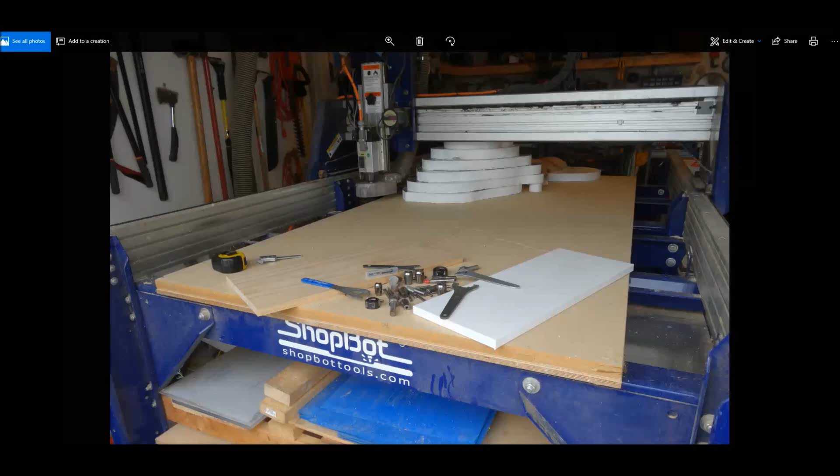Here, as you can see, I've got a pile of bits and a couple boards, and what we're going to look at today is building ourselves a custom bit holder.

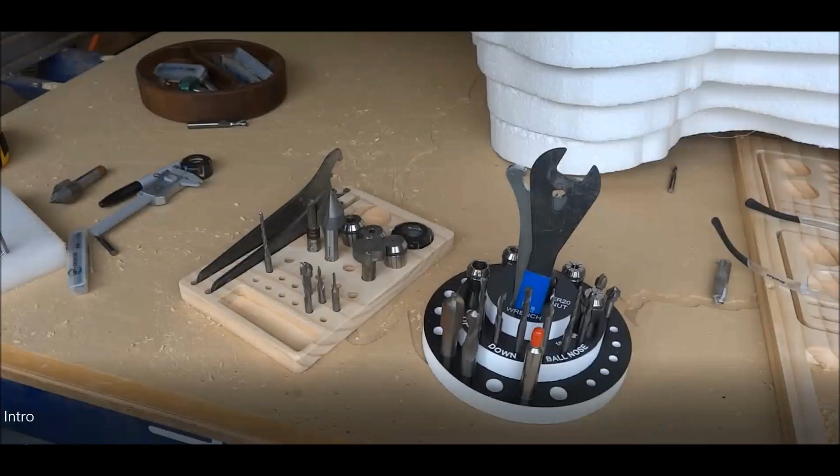So with that being said, let's look at the two different ones we're going to get into in this training. We'll start out with a simple one, just a rectangular block of wood with different holes in it for different diameter bits.

We're going to look at tolerances that you can add so you're not grabbing a really sharp bit with your soft fingers trying to pull that thing out of there.

Then we'll get a little more fancy into the circular version, where we actually get into labeling it and making different tiers for different bits. So these are the two different bit holders we'll go through in today's training.

All right, let's get this started by looking at a hot mess that I have laying here—bits laying around, collets, collet nuts.

First thing let's do—we've got two different ShopBots we're setting this up for. A full-size PRS with a 2-horse spindle, which uses a larger collet than the little desktop with a 1-horse spindle. So you get two different size collets.

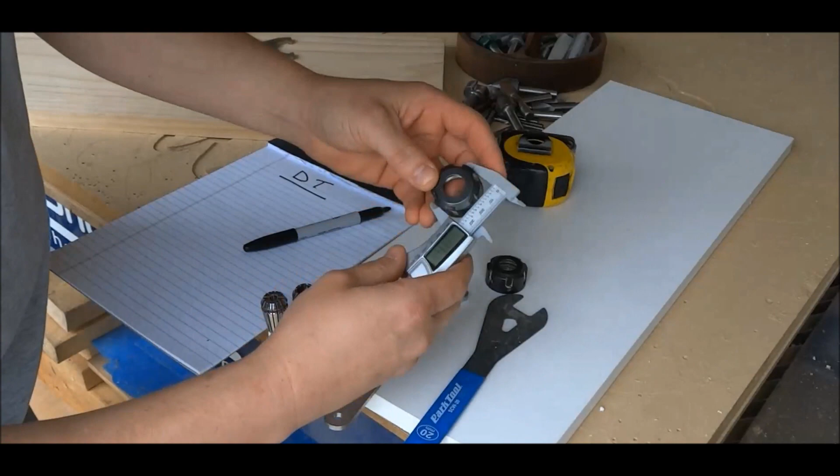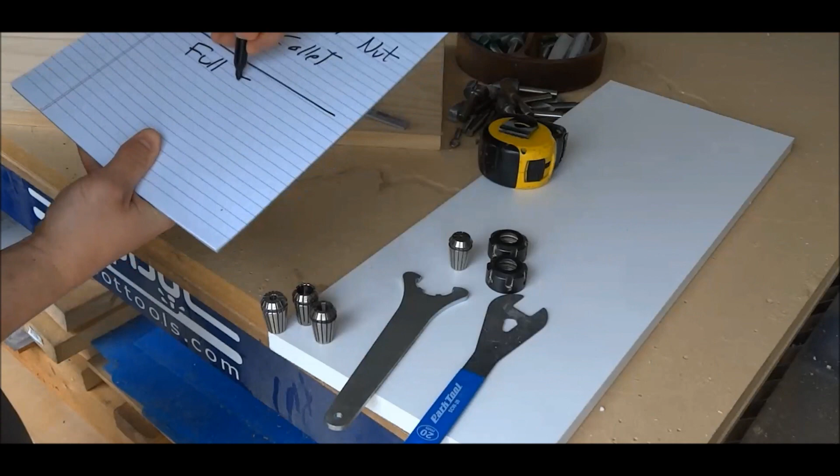I'm measuring the collet nuts, I'm measuring the collets, and I'm even going to get into measuring bit diameter for the shanks and also the wrenches.

Because what we want to do is know the exact size measurements, and then add in a tolerance. So when we're pulling pieces in and out of our new tool holder, we're not forcing them—we want them to sit in there freely. So measuring the board, measuring the tools, measuring whatever it is you're going to build into your tool holder.

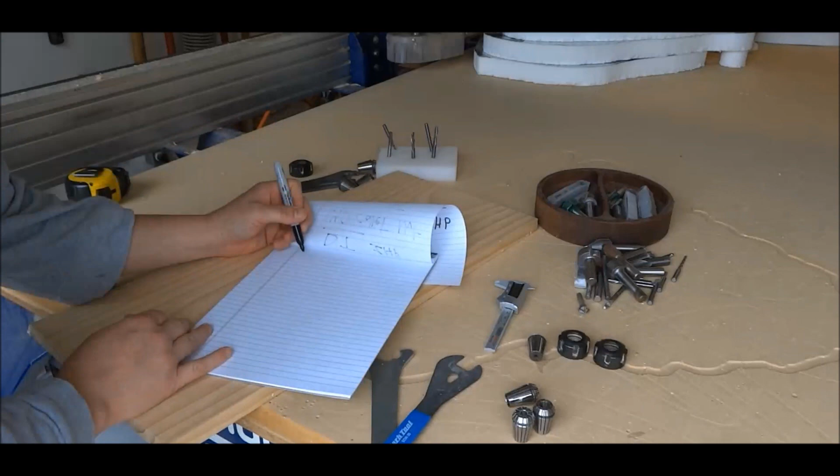And that's what's neat—you set this up for whatever you want it to have on there. So I'm just taking measurements for my two different sets.

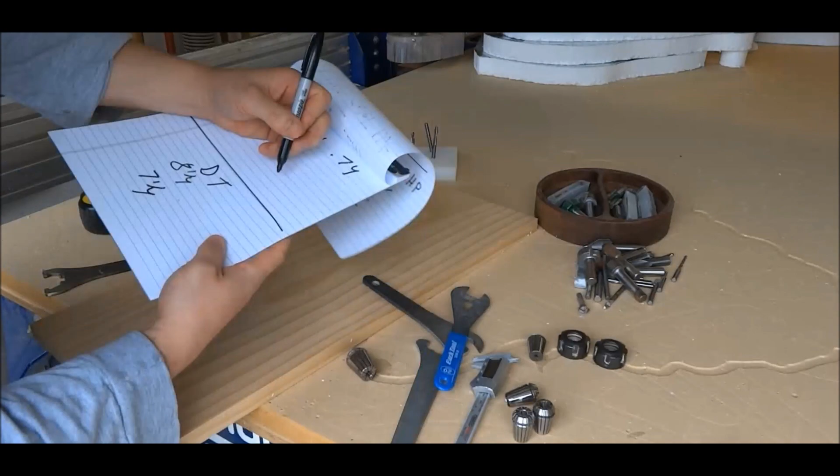The wood one we'll do first, we'll build for the full-size machine with the 2-horse spindle. Then we'll use the PVC, the whiteboard there that you can see me spray painting black, because I want to V-carve into it where I can carve down and expose the labeling of where the bits should be—just another thing to help me keep track of the different bits.

So let's go ahead and look at getting this set up. Let's start out here setting this up with the board I had.

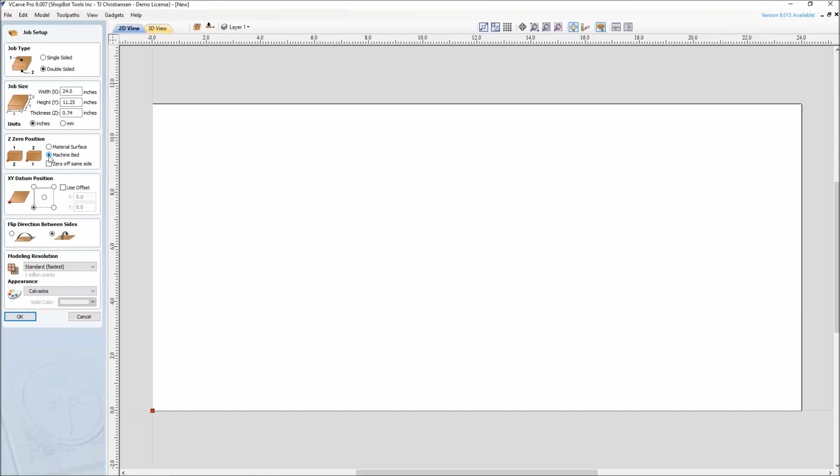This one was just pine because that's what I had laying around, and as you saw in the video, I measured it—0.74 inches in thickness. And this one here, going to zero to the machine bed, which is single-sided, not double-sided.

Material size, bottom left corner, because that matches our ShopBot proximity switches in the bottom left corner. Again, you can always come back and change this stuff. So I'm going to go ahead and accept those parameters.

And then what we'll do is set this job up for the size of the bit. So I kind of have an idea—I'm just going to walk you through me setting up a job.

I know if I go vertically here, I could possibly get multiple tool holders out of here, share them with your friends, or put them in the training area at ShopBot. There's no reason for me to have a 24-inch long bit holder—it's getting to be too much.

So I'm just going to make this one 6 inches tall, and go with a 6x9 size. I can add my corners to this if I wanted to make external or internal corners. Just going through my design.

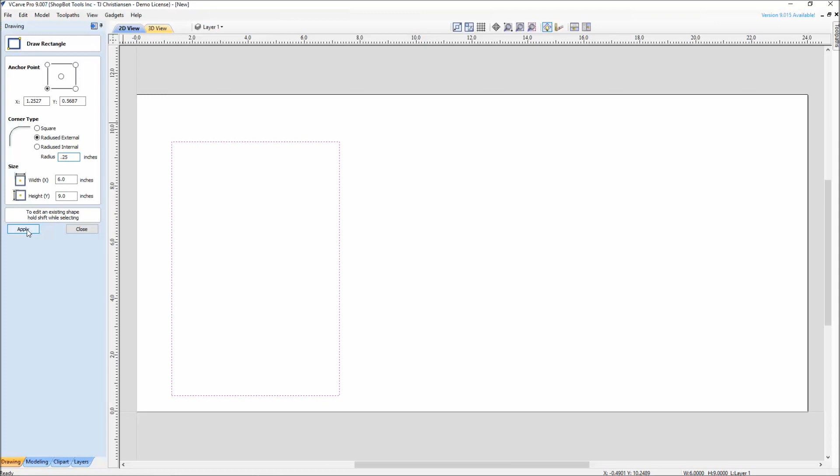For some of you just learning VCarve Pro or Aspire, whatever it is, I'd recommend going up to the video tutorial browser for help, because if you're watching me do this and you've never done it before, you're going to go, wow, is he going fast in there?

So I'd recommend using some of the tutorials for that. I'm just going to set this up using the measurements that I had, and this here is for the wrenches, the longer ones.

So I'm going to choose to put them in first. Since I'm going to use a 1/4-inch bit, I'm going to go a little bit wider in my width in X, to make sure that bit fits in there.

And 8.5 inches was just a little bit longer than the longest wrench, which actually mic'd out at 8.25. Again, I don't want anything to be a snug fit here. I just want it to be able to go easily in and out when I grab it. So I want that centered vertically.

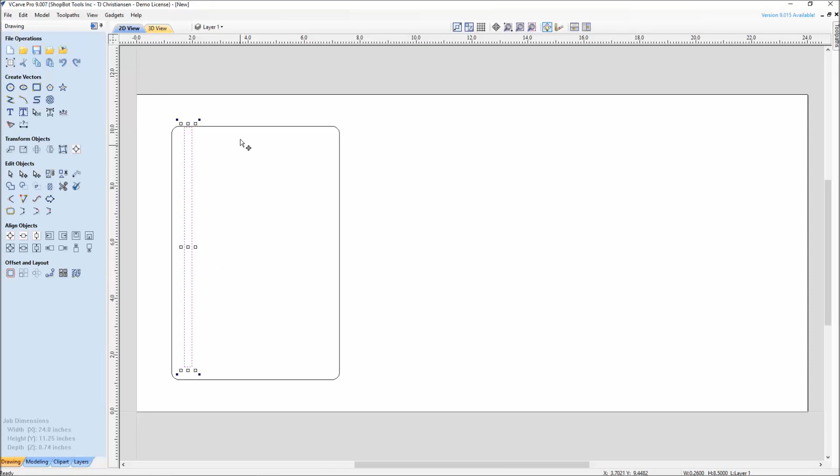I'm going to hold down the shift key and then shift where I want to vertically align that to, and I'm just going to give that a nice gap in between these two.

I did measure the other wrench and it was shorter, but I'm just putting wrenches in and out of there. I'm not too concerned about getting them in a specific order. I'm sure there's some really interesting bit holders out there where people get pretty specific, but for me, I'm just going to go ahead and throw two of them on here, and I'd say I want a gap in between of, say, a half of an inch.

Decimals and whatever your decimal placement is are crucial, and so is whatever it is that you put in for a measurement.

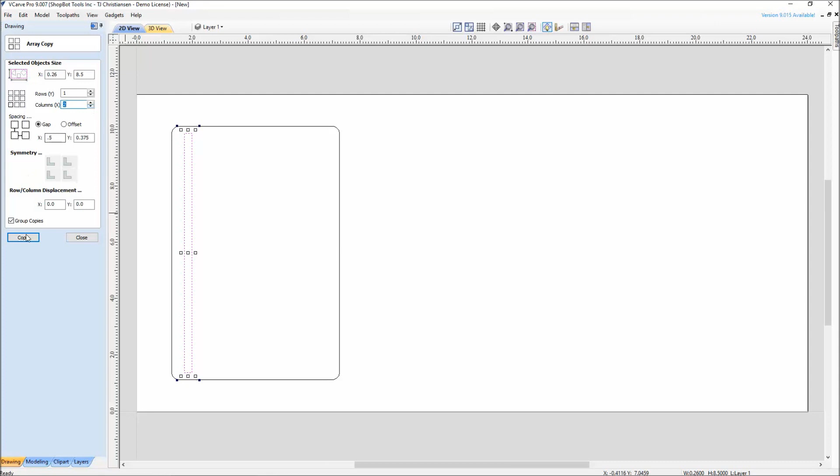And there's those. I've got them grouped right now. I can have that unchecked, but right now it keeps them the way they are.

Since this was for our larger machine with the 2-horse spindle, I mic'd out the collet nut at 1.65 diameter for the circle. I don't want to again have my 1.65 be the exact size of that hole, because that collet's going to go down in there so tight.

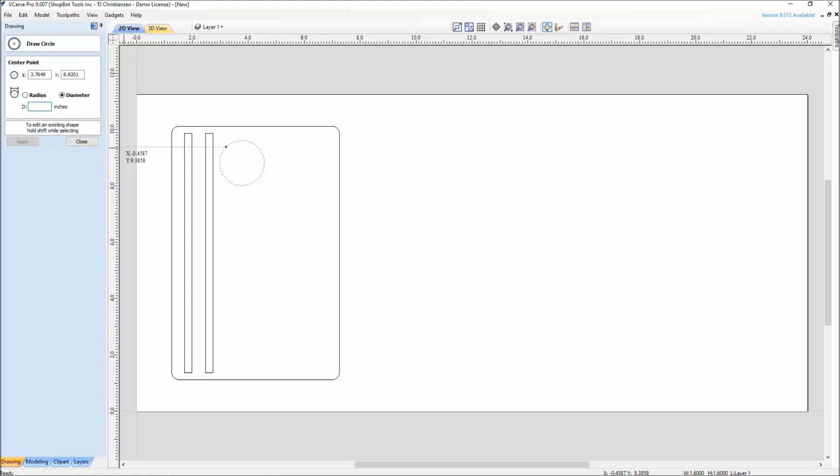This isn't a joint where we need like a mortise and tenon stiff joint here. So what I'm going to do is go ahead and add a tolerance to that, and I'm just going to make that 1.72, so it's a little bit larger.

And here again, I could sit here with the array copy and get these exactly the way I wanted, but I'm just hitting copy and paste and moving things over.

I do usually rock 4 different size collets because I have an 1/8 inch, 1/4 inch, 3/8, and a 1/2 inch, and those were miking out at 0.85.

And instead of earlier where I just typed in the measurement, if I didn't know what I wanted to add for a tolerance, the math here, I could type in 0.85 plus 0.03. That gives it a nice big tolerance on it, and there is my 0.88.

And this one here, since I did want 4 of them across, I will just kind of say, hey, I don't want it quite touching that vector. Maybe bring it down.

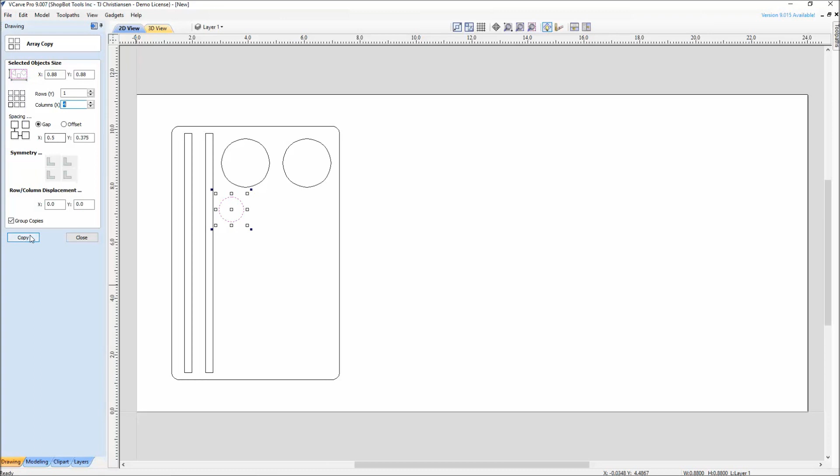In this case here, when I array it and I say I want 4 of them back and forth, a 1/2 inch gap is going to be too much, so I'll undo that, make sure I have that selected, and I'll go with a 1/4 inch here. And 1/4 inch still is a little too much.

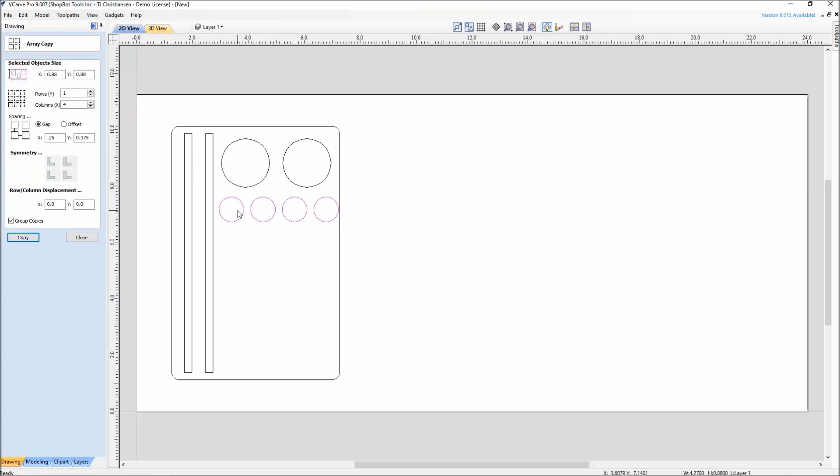I don't need to worry about these collets sticking out too much further than the hole, because it's not like it's a bit that's sticking out. The collet actually tapers down smaller, so I am going to go ahead and just bring that back.

Make sure I have that selected, and I'll just go 3/16 on this for my spacing, 3/16. There's my 4, and that just gives me, that's for my collet, and then my collet nut.

So collet nuts, collets, and then again, I'm just going to start thinking about the different size bits that I use. I will tell you, if you're going to make a 1/2 inch diameter hole for a 1/2 inch diameter shaft of your router bit, you're really getting yourself in trouble as far as handling it.

Because you push that bit down in there as the shaft of it, and then when you go to pull it out, the ShopBot's going to cut that tight of a tolerance, that tight of a fit.

So I'm saying what you need to add here is a tolerance. So I actually go ahead and make these a little bit larger. I go 0.53 on that one.

Let's see, as we work down here, what do they say were my 4 different sizes? We have a 1/2 inch shaft, do a 3/8 shaft, where that one's 0.375, and again, I just type in my 0.03 equals, and there's that one.

Then my next one here, coming down, a 1/4 inch bit, and right here, instead of that one, I would add in 0.03, and that gives me my 0.28.

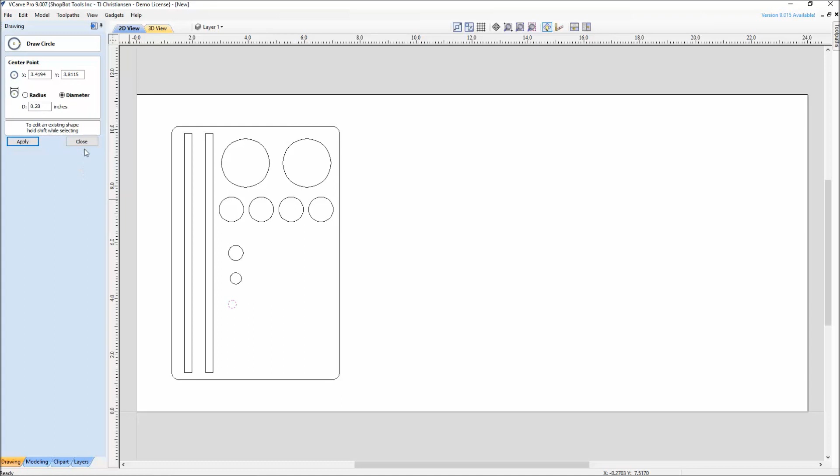And yeah, I do use some 1/8 inch bits. Those I'm not even going to put in a bit holder, because I'd rather those be locked away somewhere where they're not going to get snapped.

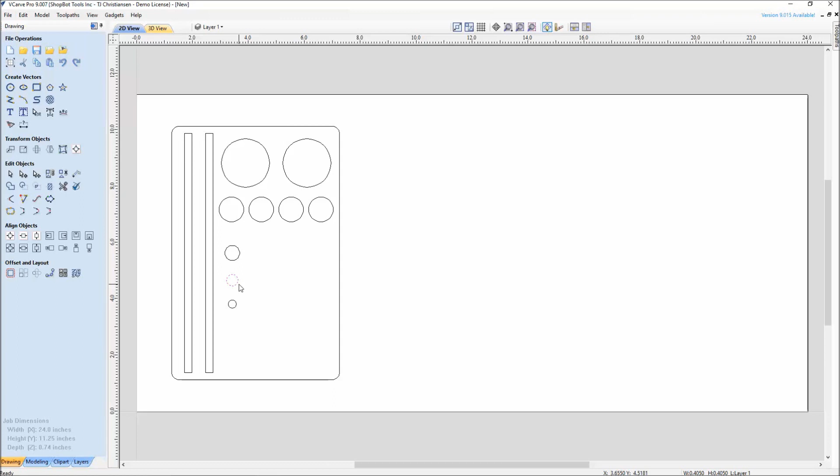So what I will do with these 3 is, these are the most commonly used shaft sizes that I'm using, and the 1/4 inch one is obviously the one that you use the most. I could sit here all day and get these exactly centered and lined up, but I'm just going to go by eye. Again, it's just a simple bit holder here.

This one here, I wanted to copy and paste. I'm going to have 2 rows of 1/4 inch shafts, since I use that bit more. So I'm just again eyeballing these.

Let's say we want 4 of these across with the 1/2 inch. I'll go ahead and mark my X as 4, and I'll try my spacing. Again, I'm just guessing, eyeballing. 1/2 inch is probably a little too much, I'm getting it too close to the sides. I'll go 3/8, 0.375. And there's my 3/8 size.

My 1/2 inch — these being a little bit smaller, I could probably increase this to 5 with the same spacing and get my 5 across. And then down here with the 1/4 inch, since it's a smaller diameter hole, I can get more of them across a span.

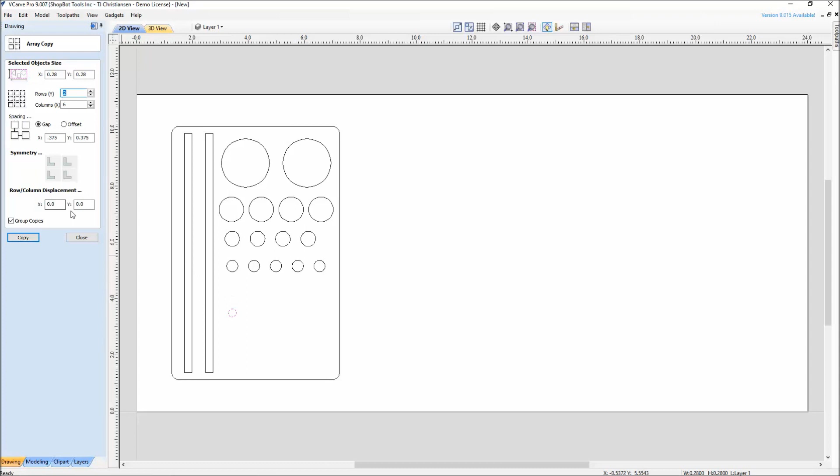I'll go 6. And right there, instead of doing it twice, what I could have done was delete this one, grab this, and say I want 6 across and 2 in the vertical, and there's those right there.

So I'll go ahead and grab everything and center them all within each other. The only problem was up top, those weren't grouped already, so I'll undo those and group them by hitting G or U to group or ungroup on the keyboard, or using the icons, which locks those in place. Here we go — everything's centered within each other.

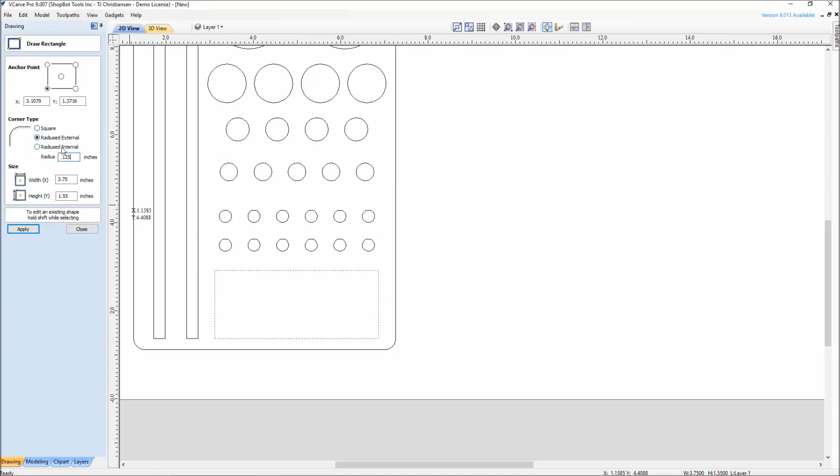And then just one little thing — I use screws a lot for a hold down. So I'm going to come over here and draw a rectangle. Since I'm going to be using a 1/4 inch bit, I'll add that radius to my side so I can see what it's going to look like. That's just something I can put screws and stuff down in to hold it.

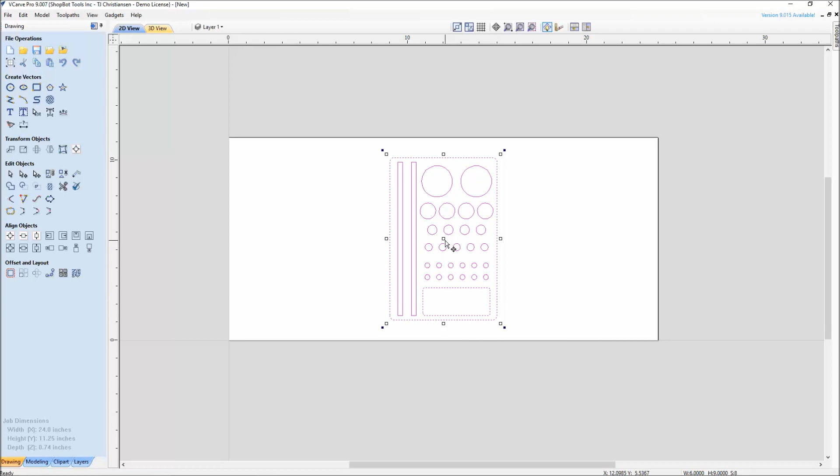So just a real simple bit holder. If I wasn't talking, this would be a pretty quick drawing to do. But what's neat about this is I can center it in my material, and note that I actually have spaces here to grab it and make copies of it. And I can fit 3 of them. Whoops, I'm sorry.

I could grab the whole thing and copy and paste it like I was doing, or I could array it if that's the way I wanted to do it. So I'm just going to copy paste — I'm not too concerned about it being perfectly lined up. I could have arrayed it all.

And really for this one, I was going to keep this as a pretty basic toolpath, and we'll get into the next one going a little more in depth. But I'm just going to sweep select everything, and make every single thing on here the same depth, except for my 3 outer vectors, because those are the profile. So here I just did a pocket, and I'm going to go 1/2 inch deep on everything — again keeping it simple, so I don't even need the advanced toolpaths on.

I'm not going to mess with up spiral or down spiral bits, because I'm doing small holes — I don't want to compact chips, and I'm doing soft pine, so I don't want to rip. So I'm just going to use a simple straight bit.

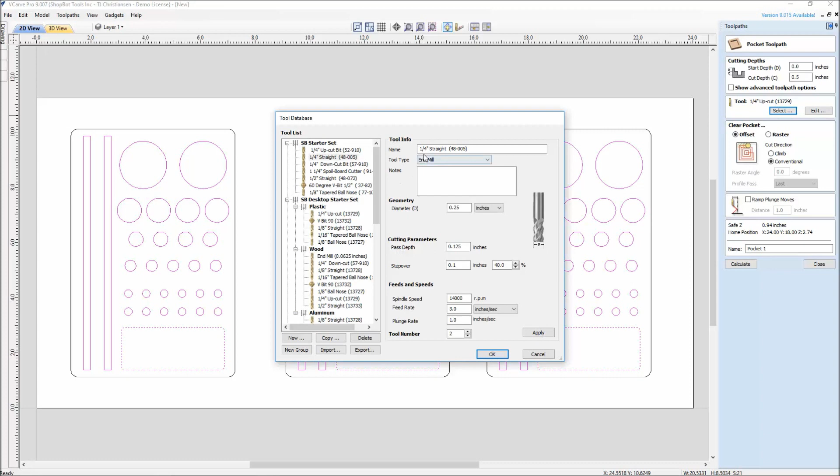And again, notice on here somebody had changed the pass depth to 0.125. So with this 0.5 depth and a straight bit, you don't see your pass depths when you're in simple mode. Switching it to advanced, you get to see this stuff.

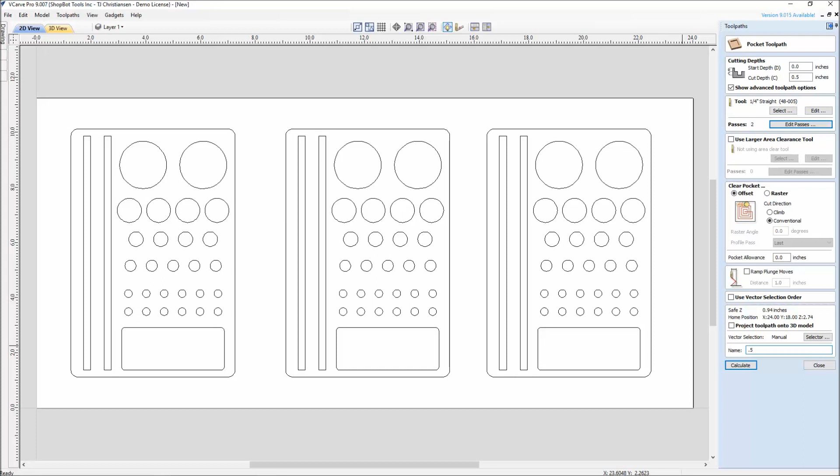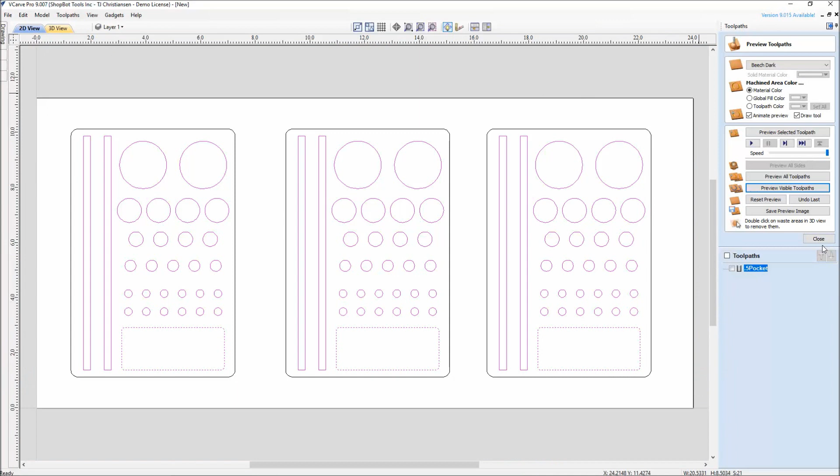I'm going to switch it to advanced, because I know I can do this in 2 passes with that soft pine. I'm going to call this 0.5 pocket. With all my clicking here, select everything, then deselect the 3 that I didn't want. Hit calculate here, I can see in blue where it's cutting, in red where the ShopBot is traveling. See the preview, what it looks like. I'll switch back to 2D, close this, and save it.

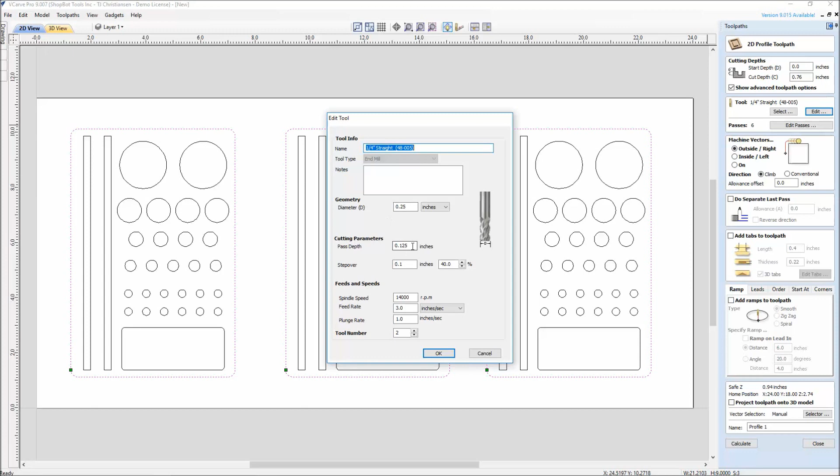Come back to the next one, which is my material thickness and depth plus 0.02, for a little bit extra into the sacrificial spoil board. Again, I'd like to use that same bit I just used for the straight bit. I know I can do 1/4 inch passes, so I could come in here and say my pass depth is 0.25, apply that and change that here. So that's something we can look at, changing pass depth, and you can look at doing that in your tool database. Again, this is all other stuff we'd get into if you want profile toolpath training.

But for this one, I'm going to go ahead and change this, add my tabs to this, edit my tabs. I'd like to have 4 tabs of these, just make sure they move out. I'm not a big fan of the auto tab placement, so what I'll do is put mine going across here, staying away from the outer edge. I like to usually put my screws along the top and bottom edge, just a couple quick spots. If I don't like where one of these tabs is, I can hover over it, click, and it goes away, then put one where I want it.

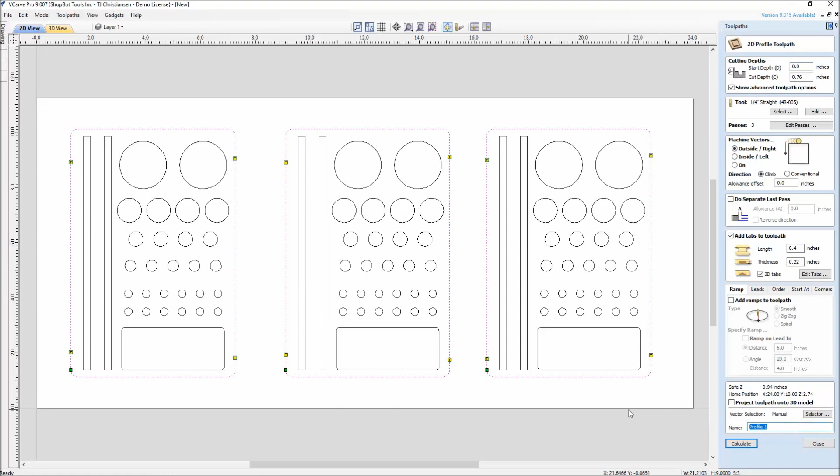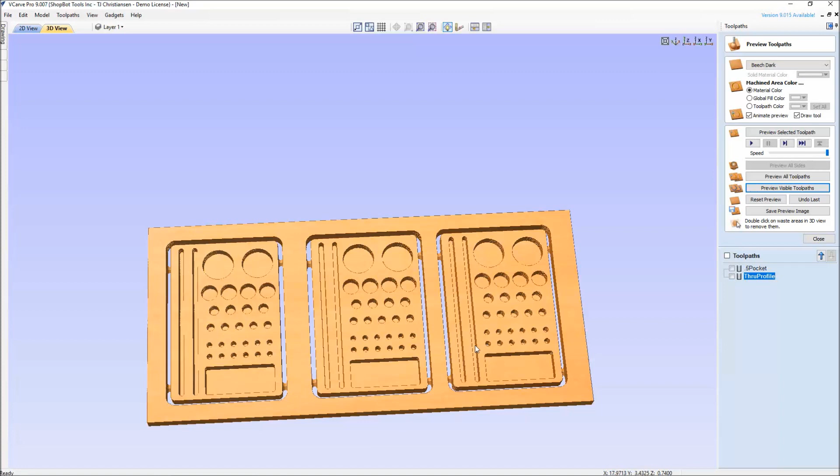And we'll just call this through profile. Again, this one was just a quick run-through, 0.74, 0.76, I'm okay with going 0.02 extra. This was just a real basic one for you to see. It's tabbed, it's all the same toolpath, there's nothing much to it, it just serves its purpose. Hold your wrenches, hold your collets, hold your collet nuts, and there is your simple setup.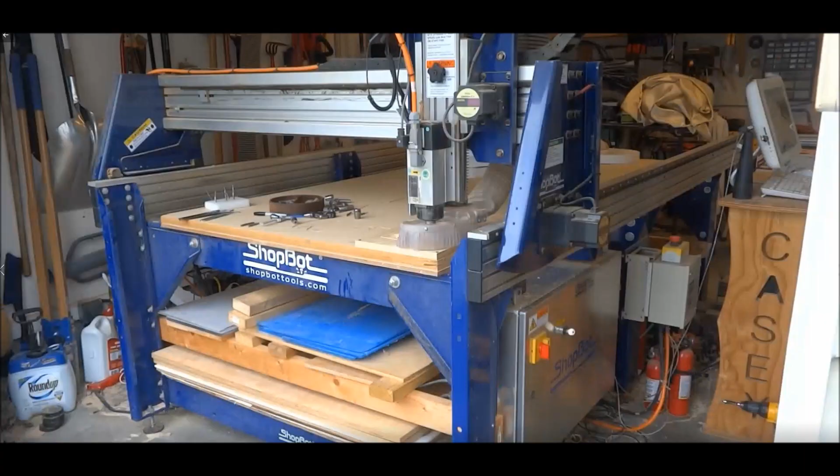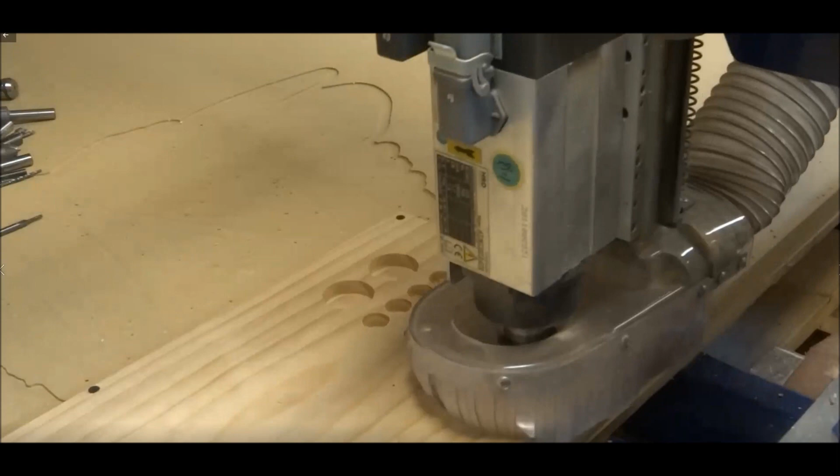So let's look at this one out on the ShopBot. Here we are in action. You can see this is on a full-size 4x8 table. It does not matter what bit holder you cut on which machine. I'm cutting the one out that I measured for that 2.2 spindle. If you're ever curious what your collet size is, look at the manual that came with your machine, it will tell you with a 2-horse spindle what size collet you're using, and there are several different sizes we have.

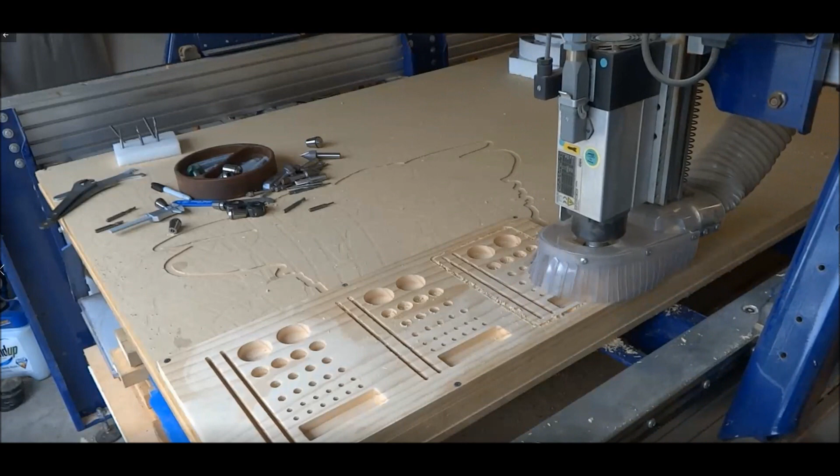You can see here it's cutting the slots for the wrenches, working its way through doing the different holes. The straight bit was just a good all-around bit for this pine material. And here it is finally doing the profile cut all the way around, and you'll see it doing the tabs here on the last pass, and that's what's keeping it from popping that final cut out.

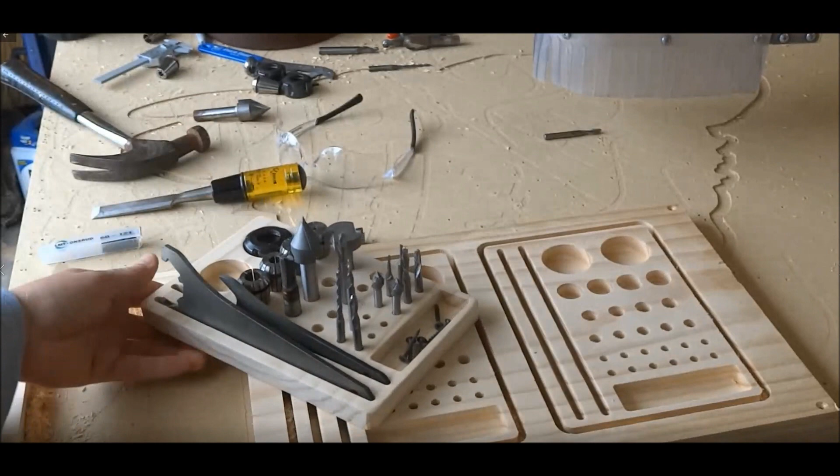And this is all I wanted, just a simple bit holder to have next to my machine. I don't need anything fancy, I keep most bits locked away, I just want a few bits out that are my most commonly used ones. I'm testing it before I pull it off the machine, is there enough tolerance? I don't want to be grabbing those sharp bits in the summer when that wood swells up, so I'm making sure everything looks good here before I take it off, and that I can get it back on there lined up. Everything looks good there, and it's just a nice simple bit holder. Serves the purpose, basic, does what it needs to do, keeps my bits organized.

With the basic one under our belt, let's look at this next one here on the right. So this was a PVC board, one of our previous trainings was how to cut that PVC with feeds and speeds. What I liked about this one was it's more of a bit holder I would keep in the training area here at ShopBot, because a lot of people, when they first come up to bits, aren't quite familiar with what the bit is. I'll admit too, I don't know how many times I've grabbed a bit thinking, is it an up spiral or down spiral?

And just by quick glance, going, oh yeah, it's a down spiral. Well, one turns to the left, one turns to the right. Geometry, you gotta be used to using that bit and working with it to know which one's which. So it is really a pretty handy one.

But just for time constraints here, we're already 17 minutes into the training. I'm just gonna look at this file here. And again, if you're looking into designing this stuff, I do recommend checking out further into a lot of the Vectric tutorials. So let's take a look at this file, this one being cut on the ShopBot.

Here we are looking at the job setup for the circular bit holder, and just to show you the job setup on this one, again 24-inch long. This was 1x10 they had out of the PVC board. This was actually left over from our PVC training, and we knew it would have a purpose, and today it's making a pretty neat bit holder.

So this one I did change and zero to the material surface, and the reason for that is we have a lot of V carving in this, and I want to make sure I get a nice transition with where I'm zeroing my Z axis in relation to how it's going to be cut down in there using the V bit. So that's the only thing I really changed here, was size of material and where I zeroed that. So I don't need to change anything there.

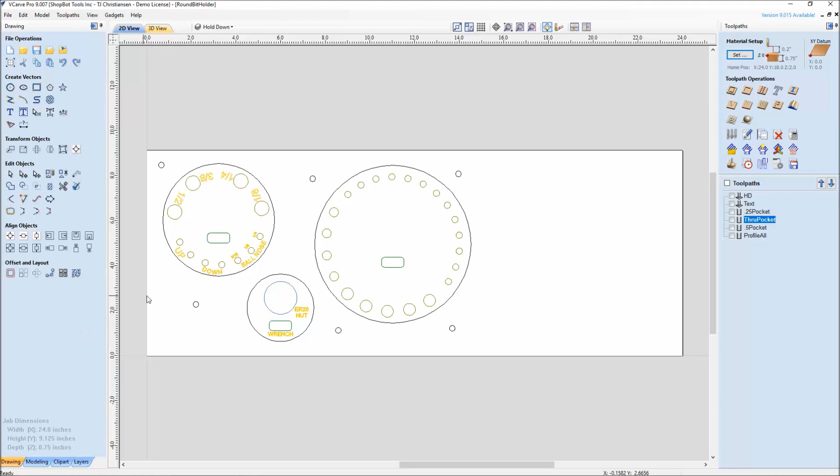And here you can see the 3 different pieces laid out flat, and you can see the screw. These are screw heads for the hold down.

And the way, just to show you a little bit about this, how this one was designed, here's the original one where I actually drew everything. It gets a little confusing, especially when you get into layers and you have everything turned on as far as layout lines and different things. There's a lot more going on when you have work in layers.

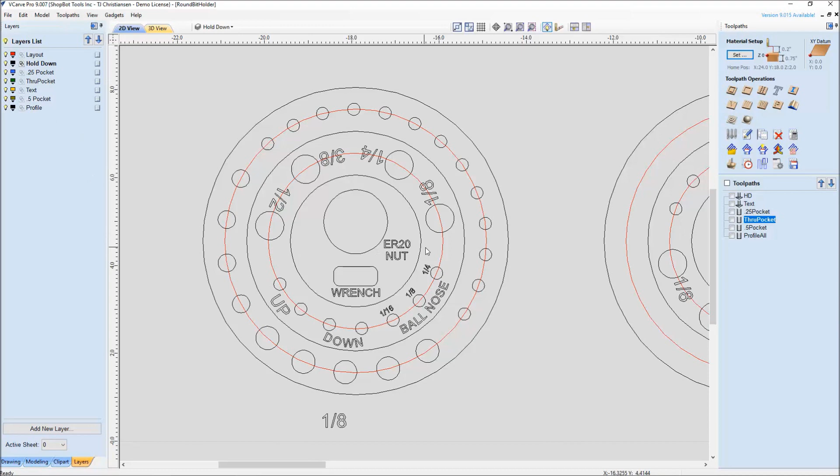But for a lot of you that are getting into projects like this, where you have parts that stack and you have multiple things going on, I really would check out the different options and tutorials on layers. They're very useful. And again, I have certain layers turned off right now because I'm not using those.

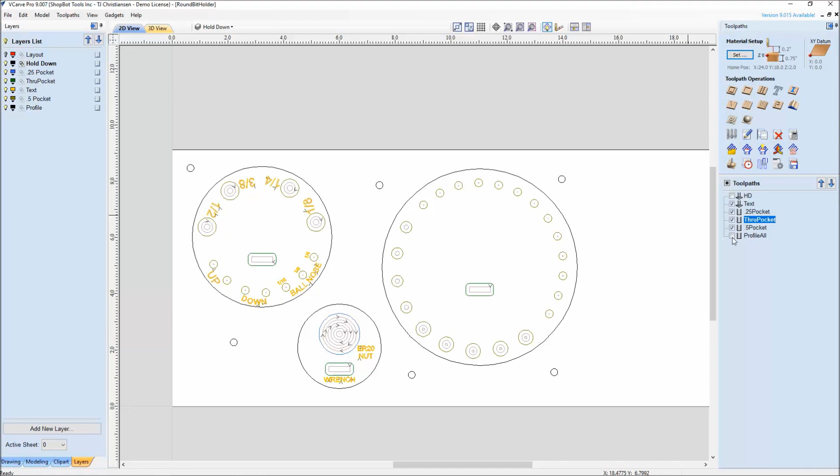And I went ahead and took my 3 different pieces, drug them out here, and laid them flat. And then after I get everything laid in there, I like to toolpath everything. Once I do that, I do turn off the wireframe up here, and I go to solid mode.

And then that's where, back here on the drawing tab you saw, I grab circles, and that's where I know that I can place these 4, 5, 6 circles in here. And I know, being out of that pink solid area, there's no way the bit will ever hit that.

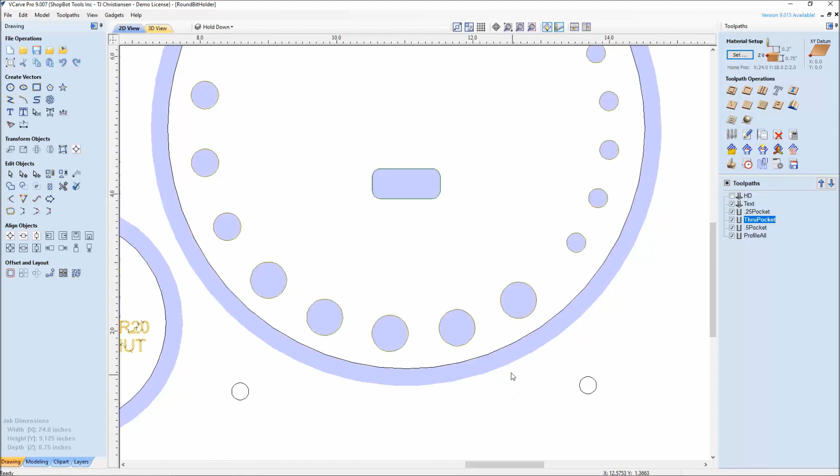And you're going to see in the video here how I actually hold this piece down, and these are screw head locations. I actually let the board sit on the ShopBot. Just the mass of the material has enough weight to hold this down, and you can see in my hold down, which is nothing more than a drilling tool path, I'm just going down in there a few thousandths, just using a mark is all it's doing.

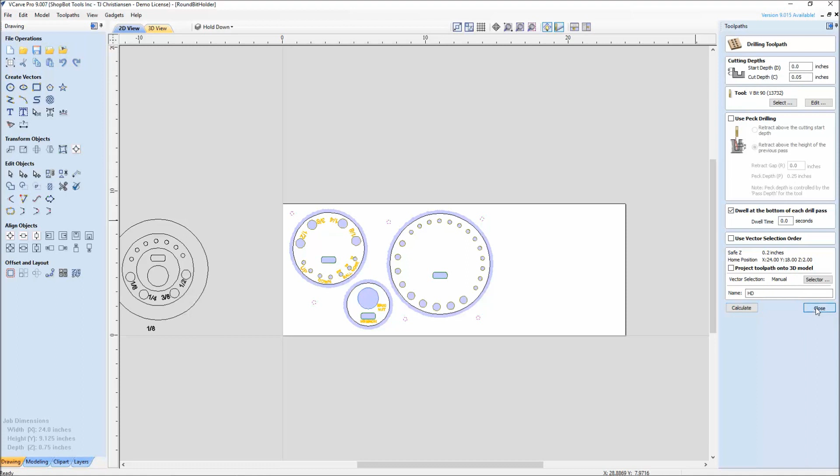And then just to show you guys the different tool paths, again, text, there's the first one. I will tell you I do cheat my text a little bit by giving it a start depth of 0.01. It usually gives me a little bit deeper of a cut. You don't want to go too deep because the deeper you give it a start depth, the more chance it has of going together.

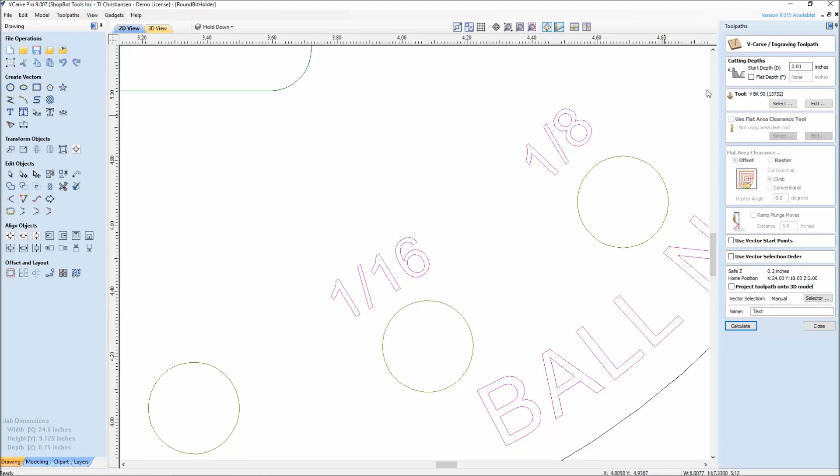I do like the little V90 that comes with the desktop starter kit, so I just use that for my V-carve. It's a wider bit, but that's just a personal preference is all.

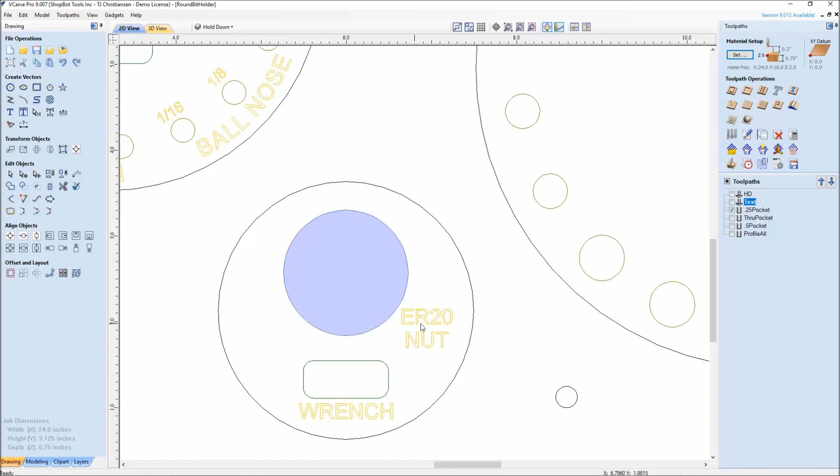Instead of it all just being one pocket on this one, like our last bit holder was, there's three different pockets. There is a 1/4 inch pocket, which is where the ER20 is, right there, you can even see one of the model numbers of that nut. For the 1 horse, it's an ER20. Our larger ones have ER30s, ER40s for the larger spindles. So that one's a 1/4 inch depth pocket.

And this one here is a through pocket. And then this one here is a 0.5 inch pocket, and then finally your profiles. So nothing too complicated, just used a lot of the, instead of the linear array.

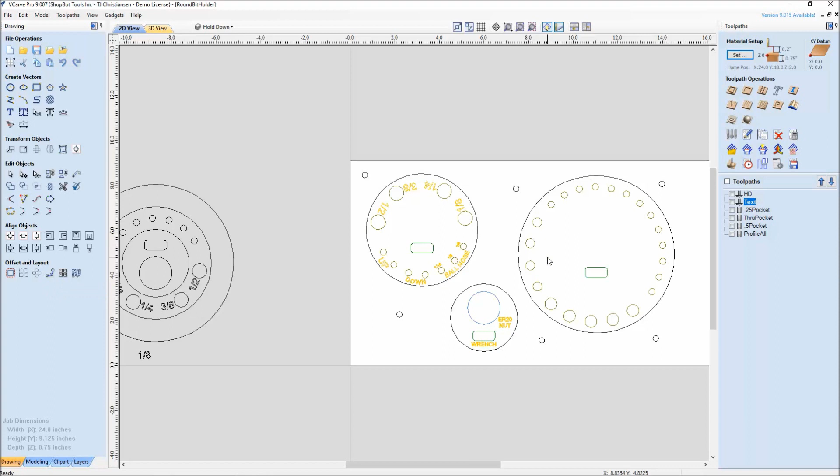This time I used a lot of the circular copy and the copy along vectors for doing this. And after this session, with the Q&A, we can definitely get into a little bit more. But for the formal training, I would just recommend browsing some of the already done tutorials and whatnot for that.

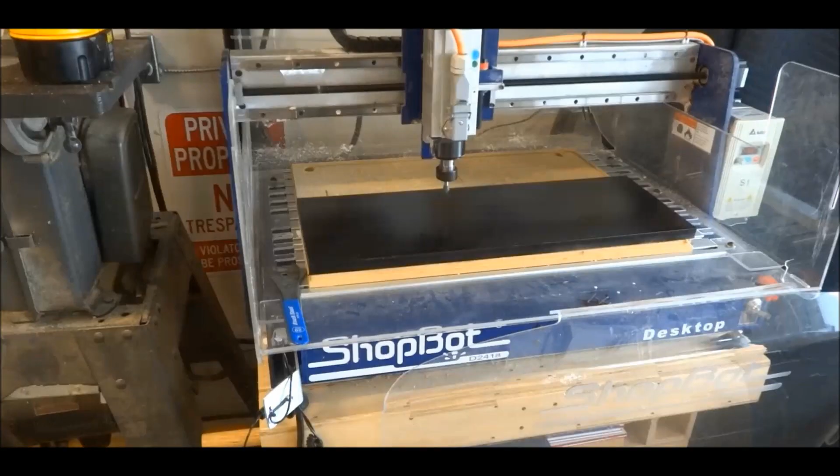All right, let's take a look at how this cuts out on the ShopBot. Here we go, it's putting our little hold down dimples in place, and after this it runs out of the way. Those are just simple little layout marks that we saw are safe in the drawing software, and now I can safely run my drywall screws in there knowing my bit will not hit those.

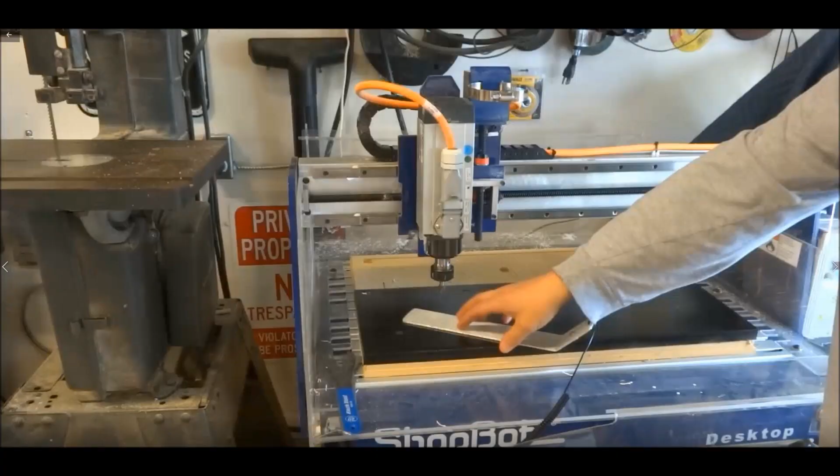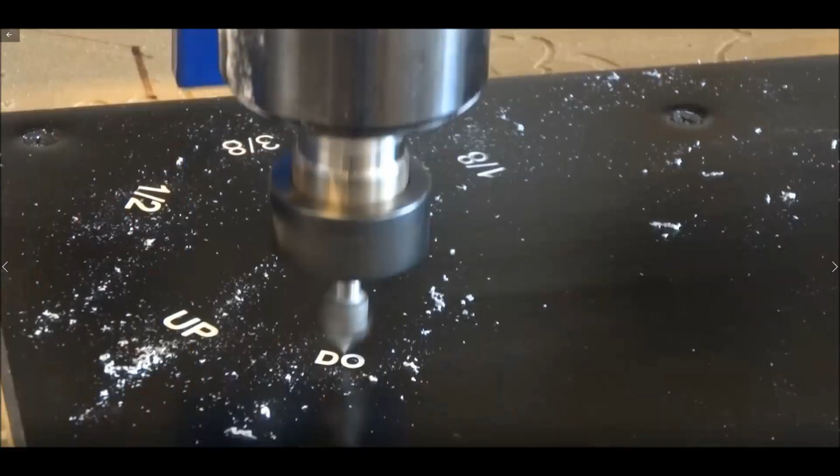I like to hold this down good and flat, especially because I'm doing a V-carve into this. I don't want any bow or anything in the material. Remember, this was just spray painted PVC. You can see it's zeroing to the top of the material, and now we're V-carving in. Notice that I re-zeroed my Z after I put my screws in place, because it did suck that back down to the table.

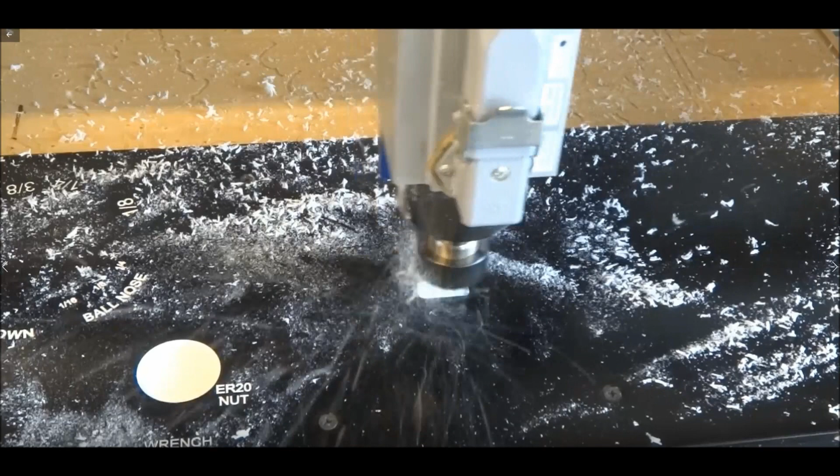And here you are doing your V-carve, same as the previous tool bit holder. This one just has some text and some fancier things on it, and I did add the tolerances to the wrenches and to the different diameter holes. We're using a little bit different bit here because it's a different material, but again we're just doing our different pockets to our different depths. Do the V-carve first, doing our pockets, and then finally we'll do the profile all the way around.

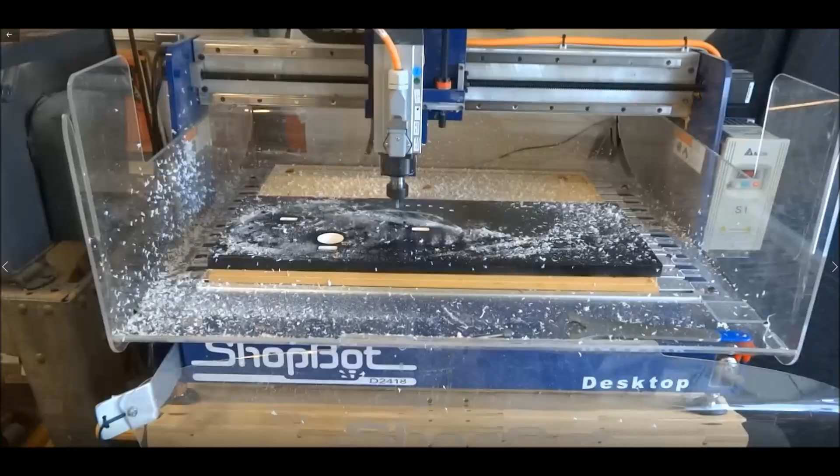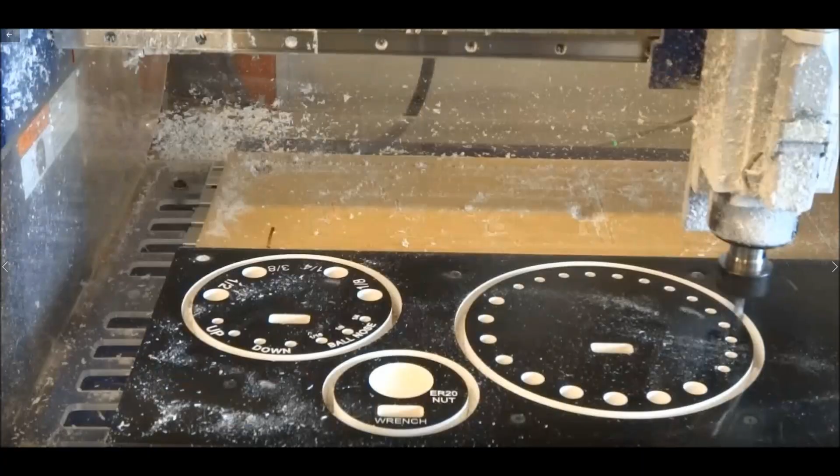And this is just a little fancier tool bit holder, and I like that it has the layout on there as far as what the bits are. If I was going to take this to the next level, I'd go ahead and label it even more. So at the end of a class, you could say, hey, we're missing our 3/8 compression bit, and that's a $70 bit. You don't want it just disappearing, so then you'd know which bit was missing. So it's very useful too.

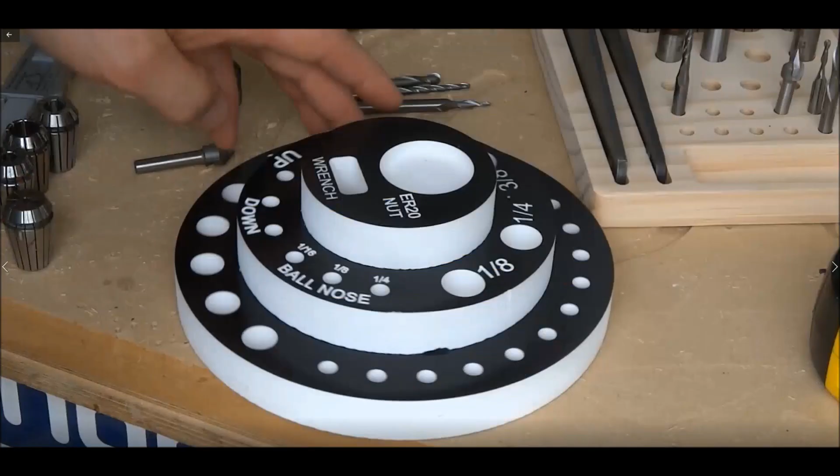And there's our tabs going around our last pass. And there we go, there's our three pieces. Being that it is PVC, it was painted, and then glued with PVC glue. I put a couple cheater little nails in the middle just to hold it in place. But it was real useful, and I thought it came out real neat.

Held the different collet nuts, sorry, the one collet nut up top, did 4 different collets, and I put my ball noses in there, my end mills in there, and the rest on the bottom layer was just kind of a free-for-all of miscellaneous bits being used. And it did hold the wrenches really nice. They kind of actually worked out to be a little handle when they both slot together, sitting next to each other and going down in that slot.

So measure what you have for tools. Different ShopBots at different eras had different tools, bits, and the wrenches came out at different sizes, but those are just two different bit holders that would be a really useful first project. It's real nice, you get the cardboard box that has the 7 bits in them, then you start acquiring other bits, and the next thing you know you're dropping bits or rolling them off the edge of the ShopBot or off the workbench.

So put them in an area like this where you can label them, have them organized, and know where they are or where they aren't. When they're not there, you're looking for them. And that's a whole other training we could do.

But I really do hope today's training was useful for you guys. This is just a simple, quick project to get started with. I would recommend everyone build one of these first and organize your bits, your collets, and there are other people who make some really neat bit holders out there that add other things to hold into their bit holders. So take it, leave it.